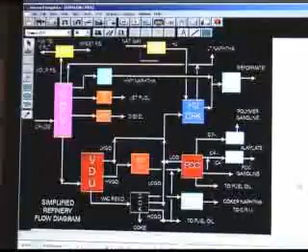Tell you what, everything we just went through, why don't we look at it on the overall refinery block flow diagram, just so we understand what we just went through, where the FCC fits in a whole refinery.

Basically, it's the bottoms off the crude unit, and then it's the side streams off the bottom. The very bottom typically will go to a coker or somewhere else. There's a limit, as we said, there's a limit to what this can take.

In straight form, I mean, it's only like, well, what was the number we had? I guess we can look it up. Yeah, about 0.1 to 0.4 CCR.

We make a resid out of it, we can go all the way up to 7% CCR. But still, you can't put the very bottom through here, it'll just coke up too fast and burn so much coke it'll get so hot, you know, can't handle it. So anyway, you might hydrotreat it ahead of time to make it run better.

And what else can we do? And a coker, of course, now some of the side streams coming off the coker, they'll go back to the cat and get processed into gasoline. And as far as some of the fuels that we took off the cat, fuel oil, which hardly anybody can burn anymore, but the gasoline's the main one, and then that LCO, a lot of times they'll go to a hydrocracker or else maybe a diesel hydrotreater.

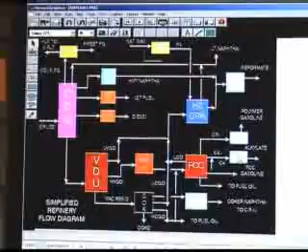So there's something wrong with about everything we make, except the alkylate, it's about the perfect gasoline.

I was in on a strike in 1980 at Tosco up in the Bay Area, and we were filling our cars up out of the alkylate tank, pure alkylate in the car, you know. I had 11-to-1 compression forward, and it knocked on everything, but it didn't knock on that. So it's about the best you can get.

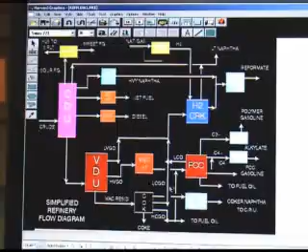Okay, like I say, we might get into reforming. That's another way of making octane. And so, okay, back to where we were now. Let's see. Okay, alkylation.

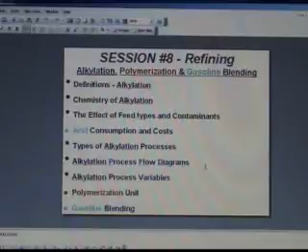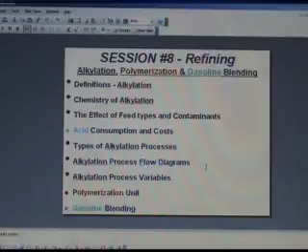There's actually another unit called polymerization, which isn't used so much anymore, but now we have a different process we're going to cover in refining. Most of the processes were desulfurization or cracking processes, but this is more like a chemical process. You basically take two C4s and fuse them together and make a C8. The C4s are too light to put much in gasoline, but the C8 is perfect. That's about what gasoline is - C7 to C9 is about where gasoline sits in the organic hierarchy.

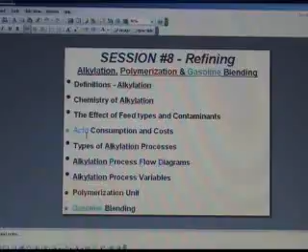So once again, we'll get into the definitions, a little chemistry, and the types of feeds and contaminants in the feed. Now here, the catalyst in alkylation is plain old acid, and even with a lot of these fixed bed catalysts, there'll be a solid catalyst with acid impregnated on it. In this particular case, they just plain add acid straight in - sulfuric acid or hydrofluoric acid are the two main catalysts for this reaction. And it's a liquid phase reaction. These other ones were real high temperature - you vaporized everything and then had a solid catalyst. In this case, you're mixing two liquids in the presence of acid, so it's a liquid phase reaction, no particulate catalyst to worry about.

We'll get into a couple of different alkylation processes, flow diagrams, and the variables, and I probably won't get into the poly unit, but if I have time at the end, we'll get into gasoline blending - how you take all these different gasoline streams together and how you blend them to make what you put in your car.

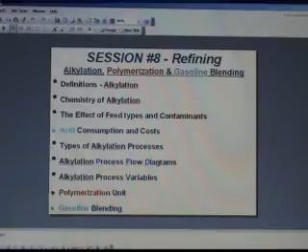Okay, I guess, let's see now. Is that big enough to see, or do I need to expand it? It's not? Okay, so was that one there? Huh? Okay, anyway, then we'll go to the next one, what we got here.

Let's get into some definitions. The purpose is to create a high-octane mixture of isoparaffin molecules, basically going from C4 to C7, C8, even C9 when you put C5s in there. So you fuse together, dimerize basically, isobutane and mixed butylenes, or propylene, or amylene, which is C5. So the product is in the gasoline boiling range and used in motor or aviation gasoline.

Used to be what they put in the planes, the propeller planes - they need real high octane there. What kind of feeds? As we said, coming off the cat cracker, mixed C3 and C4 olefin stream, iso and normal, from the FCC. Sometimes the coker creates some olefins too, so you'll feed those to the alkylation unit also.

FCC feed is much better than the coker feed though, much higher butylene content and propylene content. C4 gives the best alkylate, C3 is decent, but now on the Gulf Coast, where all the petrochemicals are, we don't have many petrochemicals around here in California. They won't put that in alkylate - they'll make polypropylene out of it. There's a lot of petrochemical plants down there, so they'll recover your propylene and give it to a plastic maker.

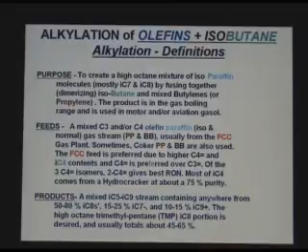Okay, what do we got next here? So a little more on definitions.

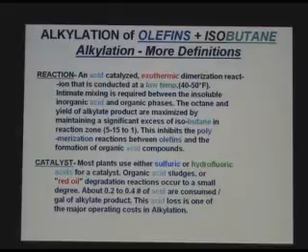The reaction is acid catalyzed and, as I mentioned, exothermic, so we have to remove some heat. It's conducted at a low temperature, not like 950 or 1,000 degrees, but 40 to 50 degrees, colder than ambient, when the sulfuric acid catalyst is used. The HF catalyst operates more like 80 or 90 degrees F, so it doesn't require as much refrigeration. Sulfuric acid is about 98%, 2% water, and it's immiscible with the oil, so you have to hammer them together with a mixer to force them to mix and react.

Now, one way to increase the amount of alkylate gasoline product is to maintain a big excess of isobutane, typically 10 to 1 or so. There'll be a stream of recycled isobutane spinning around, and we'll show that when we get to the flow diagram.

This excess isobutane inhibits polymerization reactions. We're putting two together, and under certain conditions more will want to join - two will go, four will go together, and pretty soon you'll have plastic. So this excess isobutane prevents polymerization. We want gasoline, not plastic. Some people want plastic, and that's a different plant - they'll do different things.

Catalysts, like I say, are sulfuric and hydrofluoric acid. Now, the catalyst presumably does not react in any reaction, but in the real world it does to a small extent, so you'll get some organic sludge, acid sludge - call it red oil because it's red, and it's a degradation product. You'll have to pull out some spent acid and send it back to an acid plant to be regenerated, typically about 0.2 to 0.4 pounds for every gallon. It's one of the major operating costs of alkylation, having to regenerate acid.

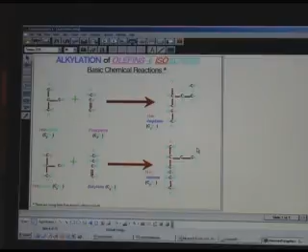So here's the basic reactions going on in alkylation. It can be with propylene and butylene. C4 plus C3 gives C7, or C4 plus C4 gives C8 - isooctane, your basic 100-octane reference fuel. When you do it with propylene, you'll get isoheptane. Remember, normal heptane was 0, and this is a whole lot higher, probably 90 or something. So just by isomerizing, you gained a whole lot of octane.

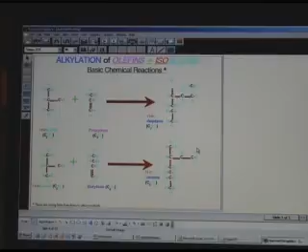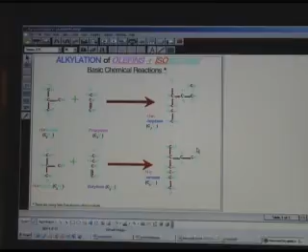The olefin - the way the reaction goes - olefins are very reactive because this double bond breaks very easily and allows it to combine with things. That's why you make polymers out of olefins: polyethylene, polypropylene, polybutylene. The double bond makes it more reactive. So another reason they don't want it in gasoline is it also reacts in the atmosphere. But anyway, it's very useful here in this alkylation process - it allows these two to go together. They wouldn't otherwise react at all without that double bond.

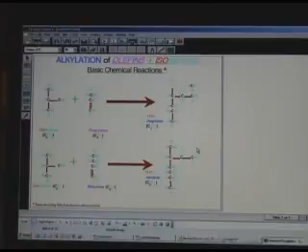Same here for C7. So that's basically it, and people want more and more alkylate as the desired gasoline. Chevron's even recovering the C5 olefin and reacting it with isobutane, which would make a C9 - isononane or nonane, something like that. So yeah, they're even doing that. There's the chemistry anyway.

As I mentioned, butylene is the preferred feedstock for making alkylate.

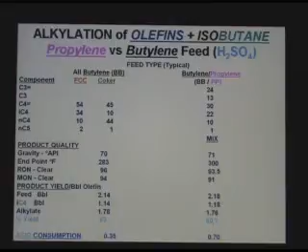This gives a little example of some of the feeds that come into the alkylation unit. FCC, as I mentioned, is a better feed, higher in butylene and higher in isobutane, which is one of the reactants. So that's an all-butylene feed.

Here's the kind of product quality you'll get: octane of 96 research and 94 motor. Actually, that's an interesting property of alkylate. Most gasolines have a difference between research and motor of 5 to 10; alkylate's much smaller. The way we rate gasoline in the U.S. is R plus M over 2, the average between these two. So alkylate has an advantage in that the motor is much higher, so your average ends up pretty high. With reformate, that difference is 8 or 10 numbers. So another advantage of alkylate is higher motor octane. But if you have some propylene in there, that lowers the octane a little bit.

So now let's see product yield. With an all-butylene feed, you got another couple percent in total liquid yield - that's worth something. And your acid consumption was half as much with all butylene, which is a major cost.

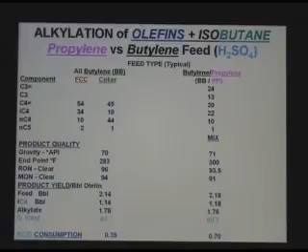Okay, what's the next one here? Okay, what do we got here?

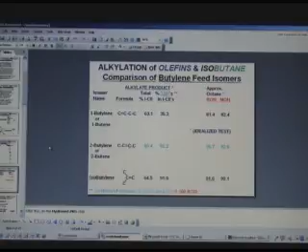Now we'll get into even more specifically on the butylenes. Some are better than others, so we prefer butylene over propylene. The higher you get in carbon number, C4, C5, C6, the more isomers you create, the more possibilities of how carbons and hydrogens combine. Whereas propylene just had one olefin, now at C4 you've got 4 or 5, or at least 3 here, and one of these has a cis and a trans. As you go up in carbon number you get more isomers, and finally the chemistry becomes impossible to describe, so you just give it bulk properties. But at least down here at C4, you can still describe the chemistry.

Just comparing them: 1-butene, 2-butene - I think 2 has a cis and a trans, but I didn't get into that detail - and isobutylene. Let's compare how they do. Percent TMPs, that's the desirable product, trimethylpentane. As you can see, 2-butene had the highest percentage of both - many more of these in the product and many more i-C8s. So not surprisingly, the octane was much higher, another 14 there and 3 or 4 there.

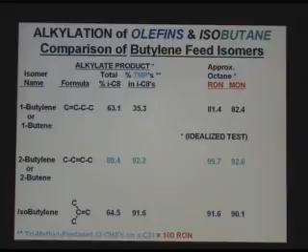So definitely would like to do this. Somebody made a process to take this mixture and maximize the amount of this. Okay, now I think the next one was, what did I say?

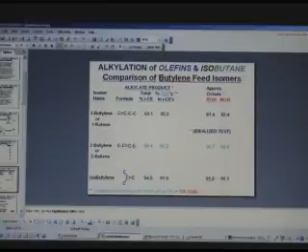We're going to go to that slide, which is, we'll look at the process that does this now. Let's see, hydroisom, okay. We're going to maximize 2-butene, and here's what happens when you use that process. Chevron has 2 of them - one on their C4 stream and one on their C5 stream, called selective hydrogenation. So let's see what it does.

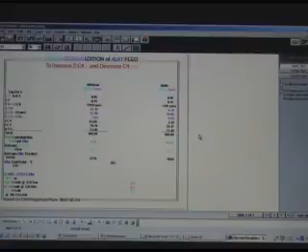Okay, there's an example there, butylene. Wait a minute here. Oh okay, now there's a significant thing there - that's butadiene. Now whereas butylenes are good, butadiene has 2 double bonds in it, and it's even more active and polymerizes even easier. In fact, that's rubber - most rubber is made from butadiene.

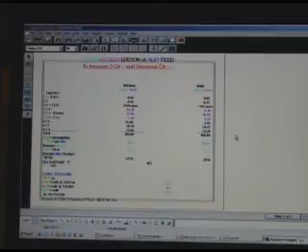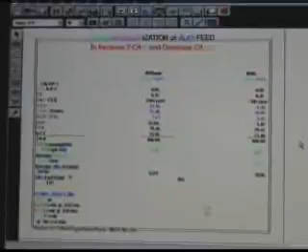And see here, when you put it through this process, it not only maximizes this 2-butene, but it also knocks down the butadiene from 8,900 ppm to less than 100. Now the reason that's important is butadiene reacts with the acid catalyst and forms more sludge, increasing your acid cost. So this process, in addition to maximizing 2-butene, also minimizes butadiene.

Okay, let's look at the butylenes. What it did was reduce the 1-butene. It increased the 2-butene, which is the one we want, and even increased the iso. So it got rid of the 1-butene, which had the lowest octane, so it helps your feed out quite a bit. And let's see, iso - down here is that iso, isobutylene, what did it do to that? It knocked that down too. So maximize 2-butene, what does it do to iso? Well it increased the isobutane - well, that's pretty much equal there.

Acid consumption went less than half, so that saved you some money. Octane went up, about a point, average product. This thing didn't focus very well - it can do better, I think that's a little better, yeah. Okay, so actual alkylate went up a pretty significant amount, 700.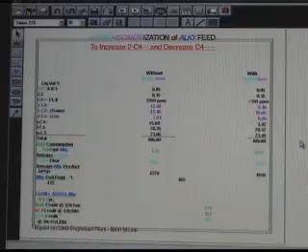So 15-20%. And these numbers got off, but all right, then credits. Okay, so here's how much money this made for you. This costs money, and you have to operate this unit, but here's what it did for you. Acid credit, 70 a ton - that was $500,000.

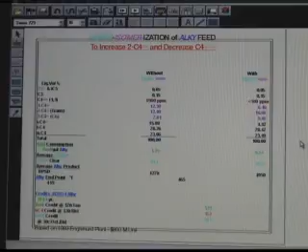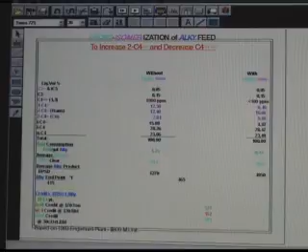Butane credit - okay, I guess it made more, made less butane. Octane credit, another 163. So all in all, it looked like it picked up 700,000 a year. So obviously you'd balance that with the cost to put this unit in and see how it paid out. These are kind of some old figures, but nevertheless, that's another process that's carried on here.

What's next after this?

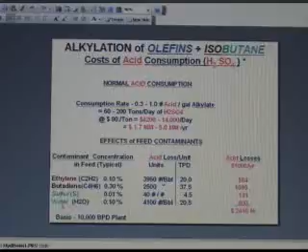Okay, we'll get into this acid consumption. I'm concentrating on sulfuric here, because that's what we're working on now, but HF has some advantages, and we'll get into that in a minute.

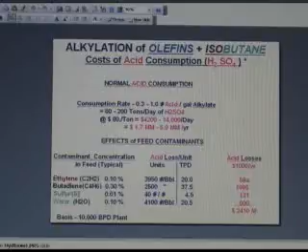Can you expand it? Oh yeah, sure. I definitely have trouble myself too. So in this case, it's sulfuric.

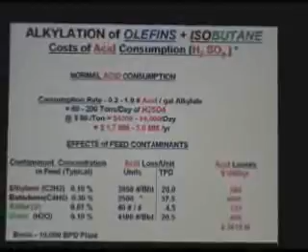Now, one advantage of sulfuric over HF, it's much less volatile. I don't know if you've seen sulfuric, but if you've been in the chem lab, you might have seen it. It's pretty heavy stuff. Used to call it oleum, I guess, because it's oily.

Anyway, so one advantage is it doesn't vaporize and put any pollutants out. And although you certainly don't want it on you, that's for sure, it's not as bad as HF.

HF, I don't know if you know what the problems are with it, but HF goes right through your skin, right to your bone. It wants calcium, and if you get a drop on you, within less than a minute, it'll be on your bone eating the calcium. So, wicked stuff.

Sulfuric, yeah, it burns, no doubt about it, but it doesn't go in and cause internal damage like HF does. But anyway, so it's been the standard process, but HF has taken over, and there's some advantages to HF.

Normal acid consumption, 0.3 to 1 pound of acid per gallon, and that many tons a day. That's quite a bit, isn't it? $80 a ton. We're talking millions a year in just acid consumption.

Certain contaminants consume acid, and you'll try to eliminate them in the feed. Ethylene, you'll try to get that out of the feed. So that means back at the cat plant, you had a deethanizer and a depropanizer. The deethanizer was supposed to take all the ethylene out before you went to the depropanizer, so that would tell you to operate that unit very well and keep the ethylene out of the propylene.

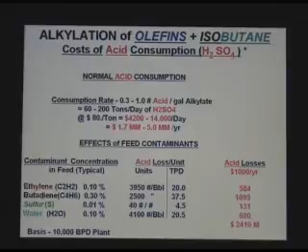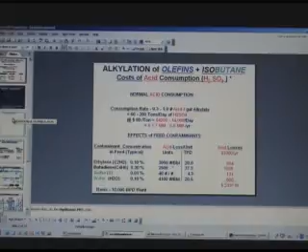Okay, what do we got next here? Let me go back and make sure I don't have a switch to make. Okay, before this, okay then. Yeah, now let's see here, I guess. You go to portrait here now. Let's see how do I do that. Yours is in portrait, the copy you have. Let's make this one in portrait so we can read it all. All right, now we'll do this.

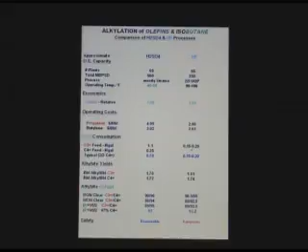Okay, so comparing HF and sulfuric. These figures aren't totally up to date by any means, but...

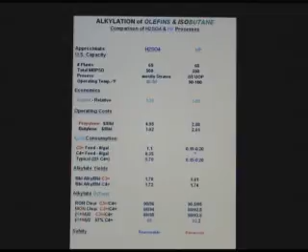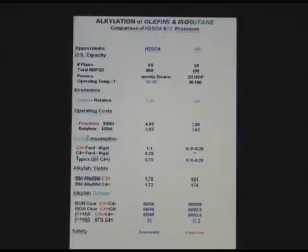Similar number of plants in U.S., more barrels a day are in sulfuric. By now, HF may have caught up because most of the new ones have been HF. UOP licensed most of the HF, but there's some other processes too, Phillips for one, and some others.

And Stratco does most of the sulfuric ones. They're a small outfit in Kansas City. And Chevron, in cooperation with them now, are doing some new cutting edge technology they may install there at El Segundo.

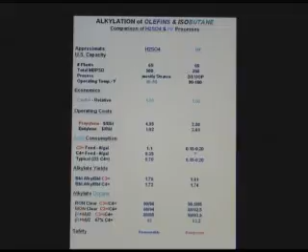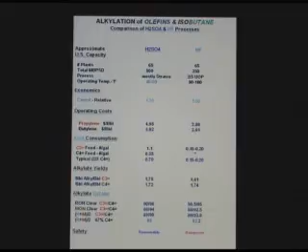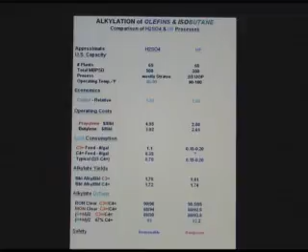Anyway, operating temperature is the major difference. Now, being 40 to 50 degrees, you've got to have refrigeration to get down that low. HF, on the other hand, can be 90 to 100, so you can pretty much do that without refrigeration, typically. Probably the lower the better too, as far as thermodynamics.

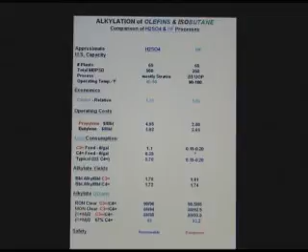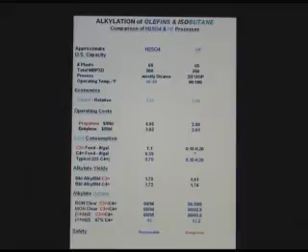Capital relative to install the plant, sulfuric would cost a little more. Operating cost, pretty close on butylene, which is your preferred stock. Propylene, I guess sulfuric costs definitely go up, because acid consumption goes up, and the consumption is much lower on HF.